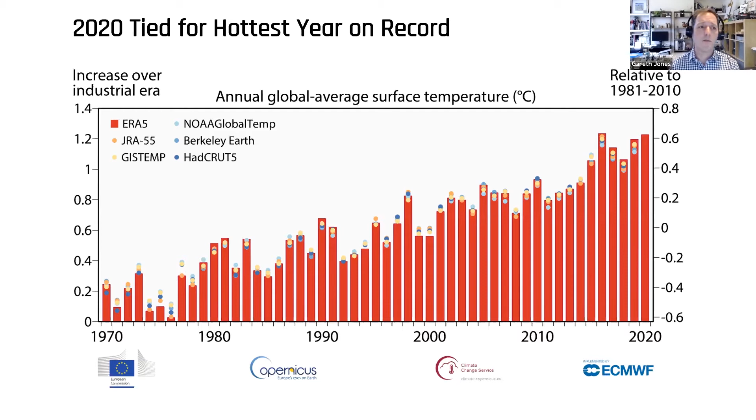The other thing notable about 2020, other than COVID and its impact, is we can't forget about the other big challenge we've got. 2020 was tied for the hottest year on record. The issue hasn't gone away. We had a minor blip down in carbon emissions with lockdown across the world, but that's coming back with a vengeance. But again, it showed that the changes we went through demonstrate that we can make a difference, a short-term difference, and we have to make changes.

I think that's really clearly illustrated here. When we're talking about heat networks, fundamentally this is about heat, but it's also about heat networks within the context of the change we need to make, climate change and decarbonisation. Heat networks are a demonstrated model for reducing carbon from heat. I know a lot of people have seen this before.

What we've got on the left is heat supply to Swedish domestic district heating systems between 1969 and 2015 by heat source. What we saw is significant growth over a 40-year period of supply from district heating. At the same time, over on the right, we've got the CO2 per megajoule of heat delivered.

During the early period it was quite heavy in terms of carbon intensity, but then we've seen an almost total decarbonisation of heat over that period, particularly between the 1980s through to 2000, start of 2005, where we've got that really big change, especially between 1980 through to 1994, that 15-year period.

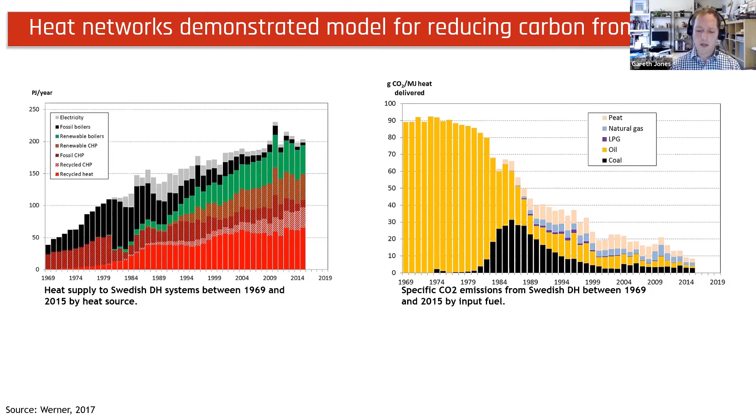I think that's the key lesson we've got here: heat networks are a really good model for decarbonising heat. And that's been recognised, which is why that's become a model being put forward. All three different strategies we've got from the Energy White Paper have a base case for heat networks, and heat networks are an attractive model for the UK.

Particular reasons: it's technology agnostic and it's permissive, so you can have multiple generations of technologies, and that's what we saw in Sweden, where one technology was substituted out for others. We saw thousands of megawatts of heat pumps come in during the 1990s and substitute out coal. So it's great from a transitionary technology perspective.

It also allows managed interaction between power and heat, and that's what we're seeing a lot of in Denmark now, where when power prices drop, you can have heat coming in and the real use of storage within that.

Really importantly, we know it actually works. It's not a technology where we have to have big changes or be counting on future change. It's not CCS, it's not hydrogen. We actually have case studies of this working at large scale. Other technologies may well work, but here we have a technology that we know works.

And we're also a really long way down the experience curve. We've been investing into this really since early 2000. We've had a couple of waves, but if we take the changes back in 2006 with code for sustainable homes, we had a lot of resurgence. So over the last 15 years we've really been looking into heat networks, and I think we're a long way down the experience curve, but it is a big challenge.

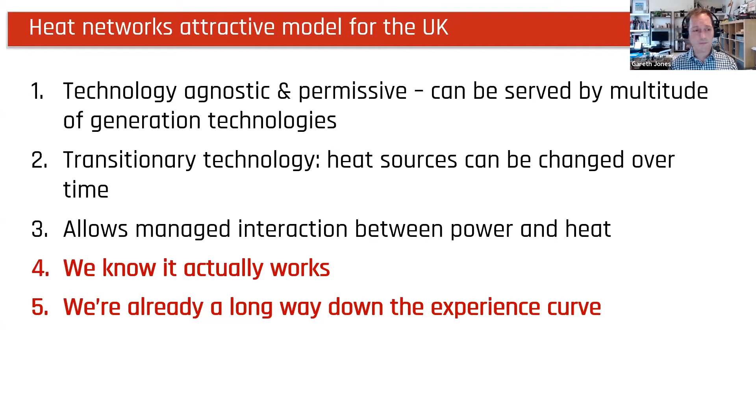But if we just start at 20%, it's a massive challenge. I'm going to do really back-of-envelope figures here, and I know all the engineers in the audience will shoot it down, but bear with me, we're talking order of magnitude here. If you just take your domestic fossil fuel boiler capacity in the UK, 25 kilowatt average boiler size, we've got 24 million homes. That equates to about 600,000 megawatts of boiler capacity that we have to transition away over the next, let's say, 25 years.

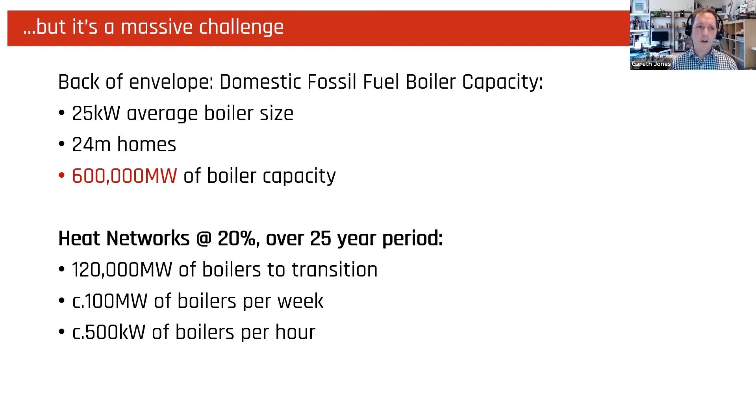If heat networks had to be 20% of that, and I think that really is the baseline of what we should be aiming for, over a 25-year period it's about 120,000 megawatts of boilers to transition away from, which is about 100 megawatts of boilers per week, or about 500 kilowatts per hour. Again, really rough numbers here. Just putting that in context, what that means is we have to have huge continuous growth sustained over a 25-year period while decarbonising.

On the left, the photo there, I took this from the Engie website. King's Yard is seen as one of the real flagship heat network developments in the UK, Olympic Park. This is the King's Yard energy centre. From the website, 45 megawatts of heat. So in terms of transitioning away capacity, that equates to about 2 times this capacity every week, and we need to do it on a zero or low carbon basis.

On the right, we've got Queen's Quay up in Glasgow, a beautiful energy development, taken from the Star Renewables website - you've got the twins down the bottom. We've got 2 water source heat pumps, 2.6 megawatts. Again, a fantastic flagship development. We need to be getting up to doing 2 of these every day.

So that's again getting to 20% market share. That effectively implies an 11% cumulative annual growth rate every year, for 25 years. Again, I don't think we should be seeing this as a 'oh my God, that's too hard to do.' It's a 'oh my God, what an opportunity.' And I think we do have a huge opportunity.

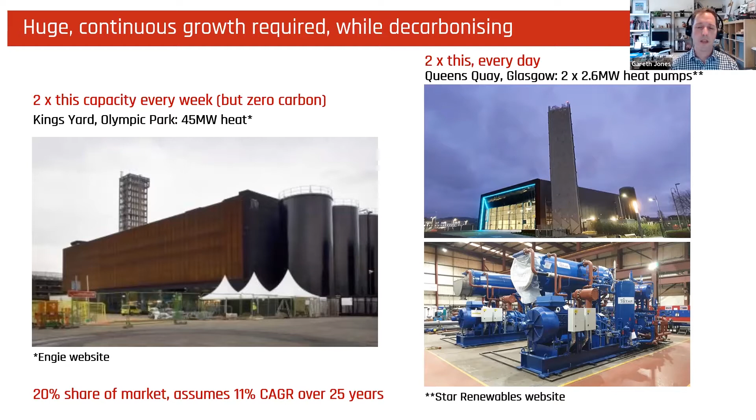And I think what we've seen over the last year is that we can transform ourselves. But it does mean that we have to tackle every single aspect of the industry, and we have to change every aspect. So we're going to now run through different speeches.

So we've got regulatory changes - Caroline's going to go through that before we get into customer protection from Shivali. Assurance, Mariota's going to go through that. CP1 2020 from Phil Jones. Then we talk about skills gap with Tanya, and then how the industry is going to respond from Noah, followed up by a panel discussion.

So first up is Caroline Bragg, who's head of policy at the ADE. Caroline, do you want to come in?

Perfect. Good morning, everyone, and thanks so much, Gareth. So, as Gareth was saying, I'm going to give a quick overview this morning about the regulation and the policy that we can see coming forward in the next few years, and then where we might go after that, and its impact on heat networks, and more particularly the ability to decarbonise.

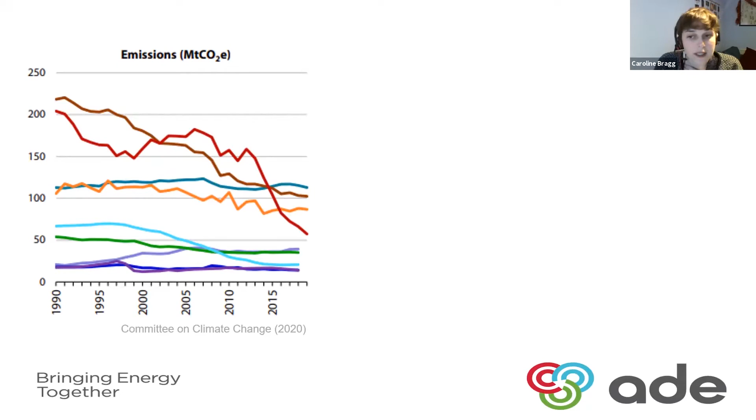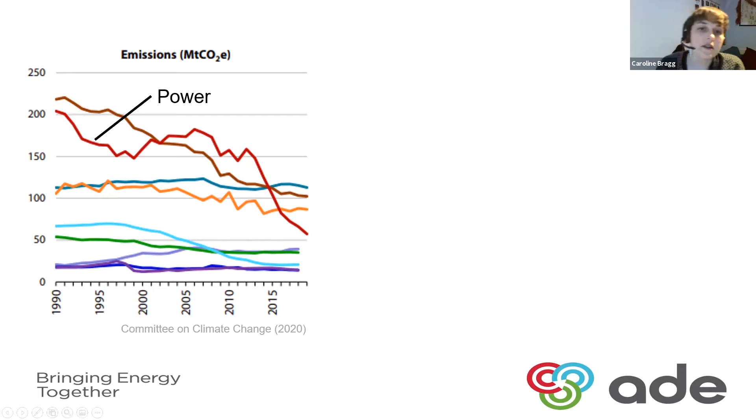Firstly, I think it's important when we consider this, just building on what Gareth has said, to consider the challenge that we have, particularly on the customer side. Obviously, as many people talk about, we have made quite significant strides in terms of power decarbonisation over the last 30 years or so, but that has not been replicated yet in building sector emissions, and they remain roughly where they have been since the 1990s.

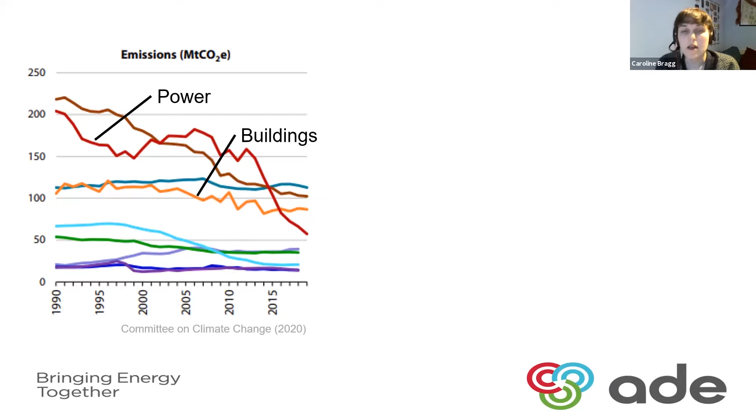On top of that, I think it's also important to bear in mind that awareness of the challenge of heat decarbonisation is actually relatively low amongst the public. So two years ago now, only 49% understood that gas central heating was a source of carbon emissions, and less than 20% had considered switching to low carbon heating.

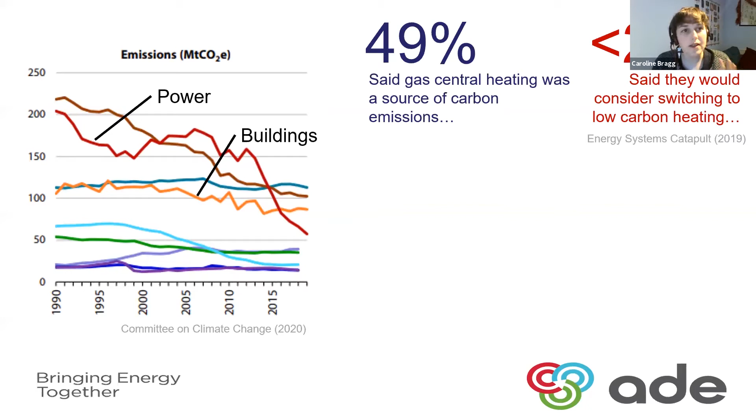You can also see that type of awareness replicated in people's understanding of heat networks in the UK. So, coming to that context, what are we going to see thrown into the mix in terms of policy and regulation in the next few years?

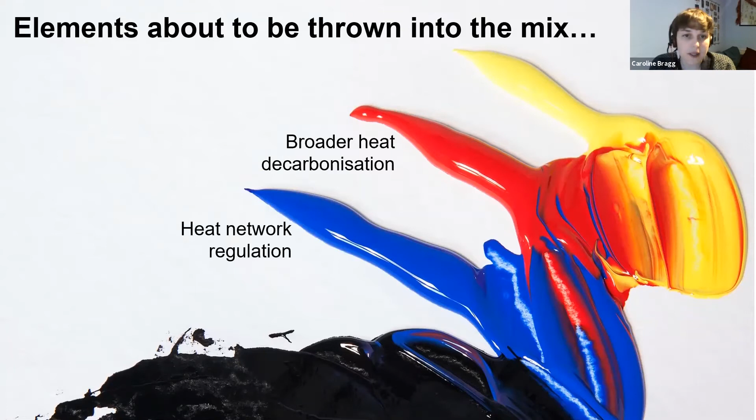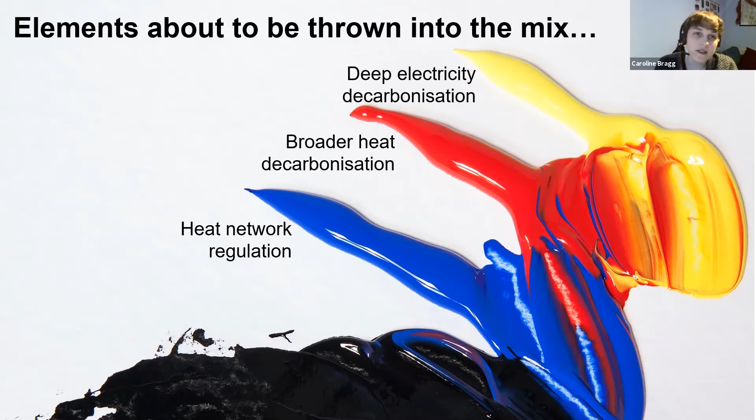What I'd like to do this morning is take you through, I think, three key themes that we need to think about. That is policy and regulation specifically targeting the heat network market and what that might mean. Secondly, looking at broader questions of heat decarbonisation, where policy and regulation might go, and what that will mean in terms of its impact on the heat network sector. And then finally, I also wanted to add a few comments about future policy and regulation towards deep electricity decarbonisation.

So, to start with, let's talk heat network regulation. As Gareth said, there is an enormous amount of policy and regulation that is coming forward this year and in the next few years.

Obviously, what we have seen is local planning pressure towards decarbonisation continuing to grow, and I think we will continue to see that going forwards, particularly when you consider the local authorities that have declared climate change emergencies, and the steps that they might take to achieve that. Clearly as well, only last week, we had new building regulations in the form of the Future Homes Standard, which will also drive particularly decarbonisation in new buildings.

The other things that we see coming forward will have a very significant impact on heat networks too. This year, we have new metering and billing requirements, and then from 2022, we will have a general authorization and licensing regime for the heat network market that will include likely customer standards and redress mechanisms, technical standards for both new and existing heat networks, emission limits or some form of emission standards for heat networks, and for those who opt for the licensing regime, new powers in the form of statutory undertaker rights.

Beyond this, and in parallel, what we are also going to see is new funding schemes in the form of the Green Heat Networks Fund from 2022, and also possibly the introduction of heat network zones that will give new rights and powers and incentives to connect to heat networks in particular areas.

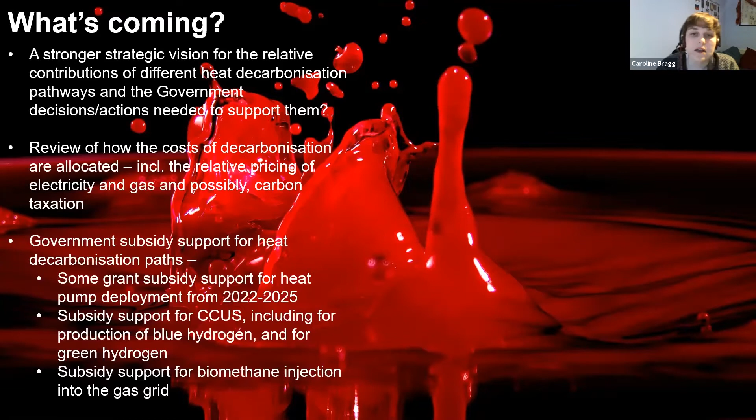Reflecting on what this means for heat networks and their decarbonisation raises a number of really important questions. Firstly, at the most political, most strategic level, this is a really crowded field at the minute, with a lot of different visions for the future jostling for political and ministerial attention. It's really important for us and for the heat network sector more broadly that we are firmly establishing ourselves and continue to maintain our place at that table.

Secondly, there is still a lot to be won and a lot of opportunities, but also some risks, in terms of how the shape and the detail of all of this regulation and policy that will come forward will reflect on its impact on the heat network market and how far it will support heat network decarbonisation.

Finally, this raises some really big questions about the future of energy infrastructure in this country and how we pay for it. Over the next few decades, it's clear the most likely outcome is we will see a really quite significant expansion of the electricity networks. We may well see new infrastructure being put in place for hydrogen, as well as the repurposing of the gas networks, and we will have new heat network infrastructure at the same time as potentially a shrinking of the existing gas network infrastructure in some places.

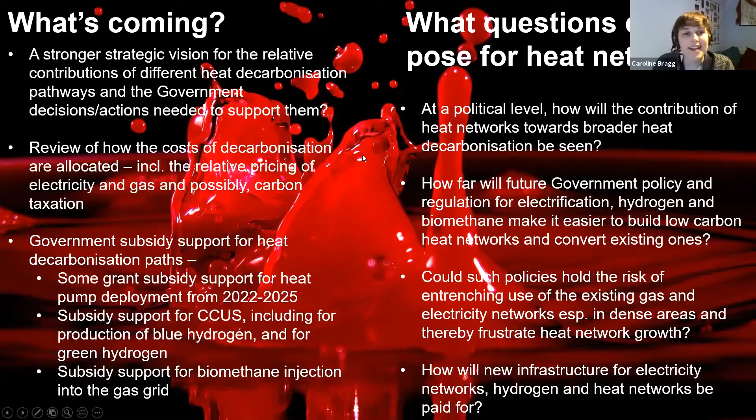Finally, I just wanted to say a couple of things in terms of where electricity policy and strategy might go over the next few years and what it might mean for heat networks. For the purposes of our discussion today, the two really big questions are firstly, what the government will say over the next 10 years about how it will secure enough and the right types of capacity for a decarbonised electricity system.

Then secondly, there is an enormous piece of work to be done about increasing flexibility across the system over the next 10, 20 years. That comes from both a national level, in terms of the ability of the system operator to access and to source flexibility from smaller distributed assets, and it also brings into view the role of the distribution network operators, their likely potential transition to a distribution system operator, and an enormous uptake in their procurement of flexibility services.

For heat networks and for their decarbonisation, I think that raises a number of specific questions. Firstly, if we think that the vision of the future on the electricity system is for much more volatile pricing, real value and revenue to be had from being flexible, that raises a question on the importance of making sure that heat networks can respond to that, making sure we're not putting in place business models or designs that frustrate the ability to respond to that, to make money out of these new markets, but also a real potential to really integrate these systems together to provide real system benefits on both the heat and electricity side from the flexibility that we have within heat networks.

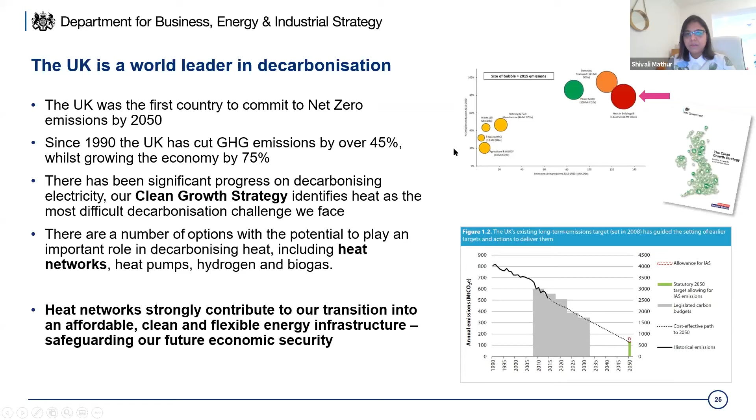Putting into perspective, today we have around 14,000 heat networks, out of which 2,000 are district heating, serving around 500,000 customers, largely gas-fired CHPs with peaking boilers. And right now we have heat networks supplying around 2% of the UK's heat demand. But in 2050, the Committee on Climate Change estimates this could be as much as 18%.

Personally, I agree with Gareth, as he said, it should be above 20%. But I like to put it more into the terawatt hours perspective. So thinking about terawatt hours, that's probably somewhere around 80 to 90 terawatt hours of heat delivered from district heat networks by 2050, which is a sizable chunk.

And these numbers are driven by the Committee on Climate Change and what they consider to be our most effective pathways to reach our carbon targets.

So why do we like heat networks so much? They do not save carbon on their own, but what they enable us to do is unlock some of the really exciting large-scale low carbon sources of heat available right away across the country, whether it's waste heat from industries, heat from energy-from-waste plants, mine workings, the Coal Authority's heat maps, rivers, and other sources. Because of the greater efficiencies, improved performance, ability to trade on the system, and the role of flexibility, ESOs and DNOs, plus the ability of heat networks to store energy and respond to the wider system.

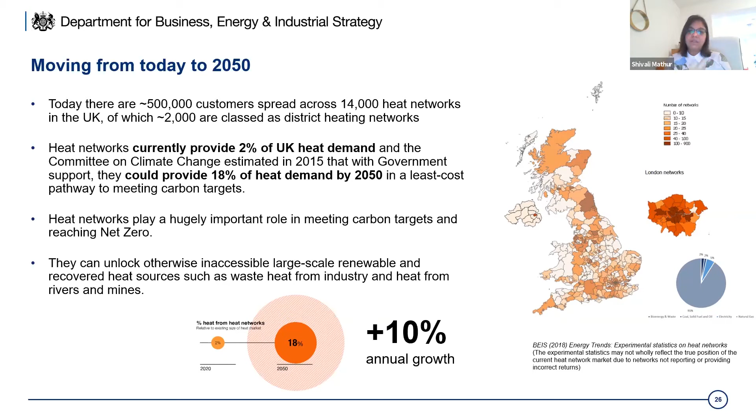What we're doing is enabling a much more effective use of energy in meeting that demand.

Now, really quickly, because I want to move to the market framework bits, I'll whiz through the UK government support available on heat networks. In addition to our own team support, the government now backs heat networks with more than £500 million, giving a strong signal of support, namely with our flagship capital support program, the Heat Networks Investment Program, HNIP, with £320 million, which provides commercial and construction funding. We recently announced the £270 million Green Heat Network Fund, targeted to decarbonize new and existing heat networks.

We're proposing a green gas levy on gas suppliers to support and fund green gas injection into our gas grid.

As government, we have been supporting local authorities since, I think, 2013, and I'm proud to say we have supported over 250 unique projects across 150 local authorities, from master planning to feasibility to detailed studies, with around £23 million of investment.

The most exciting bit of my presentation, consumer protection, is the next two categories. We are committed to developing a long-term market framework for the sector, with the heart of it being the consumer: enhancing consumer protection, setting out standards, encouraging low carbon solutions, and promoting investment. I think it's about striking the balance for consumers and investors, getting the price right through the framework.

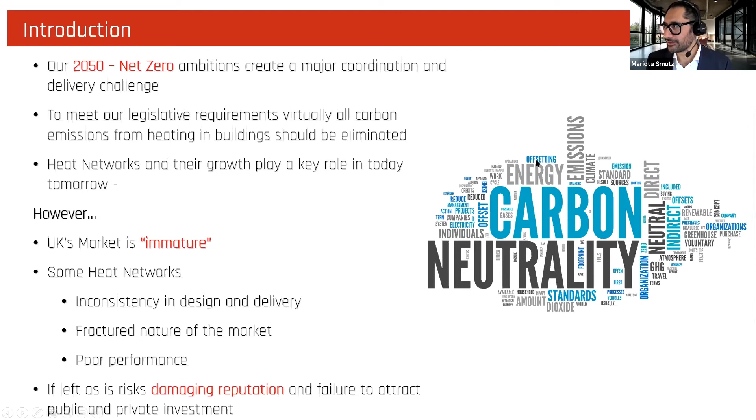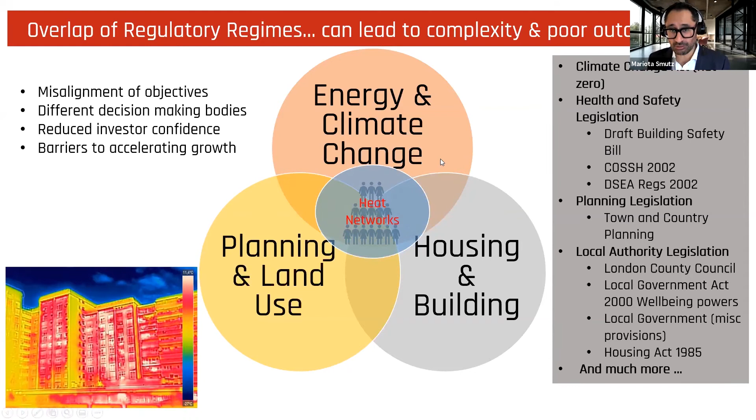Often we tend to look at these issues through the energy and climate change lens only. However, heat networks exist in that neat space across other regulatory regimes too - urban development, planning and land use, quality safe buildings that meet our needs of how we live, work, study and play today and in the future are all mechanisms that are also in flux. As mentioned earlier, we've been upended through our experience with COVID-19. So how we build and where we build and the quality of our homes creates an expectation of our service levels, and that expectation, of course, is through to our utilities that'll play a key factor. No doubt, our panel members will turn their minds to this later on. Creating quality heat networks are at the center of these different regulatory decision-making frameworks, and it's important we can navigate all of them to help this market grow.

Within the context and horrific circumstances in Grenfell, many factors came together to produce a terrible tragedy, which could sadly have been avoided. Although in the context of building safety, these systematic issues identified here can be extended across to heat networks.

Key issues identified by Dame Judith Hackitt's report: there's a culture of indifference that perpetuates issues such as unclear roles and responsibilities of those procuring, designing, constructing and maintaining buildings. The package of regulations and guidance in the form of approved documents can be ambiguous and inconsistent. The processes that drive compliance with building safety requirements are weak and complex, with poor record keeping and change control. In too many cases, competence across the system is patchy, and the product testing, labeling, and marketing regime is opaque and insufficient. And most importantly, the voices of residents often go unheard, even when safety issues are identified.

We need a cultural shift away from this indifference to a culture of high performance. We can't grow a heat network market with confidence if we don't learn from this particular event. It's really important that we recognize this systemic trend is absolutely applicable through to the heat network area.

Creating a transformational cultural shift and sector-wide behavioral change is hard, and people and industries are comfortable being comfortable. So to get to where we need to go, certification to industry specifications will provide a catalyst for real and significant change. The transition journey must begin with getting it right up front, as we don't have 40 years to allow for organic growth.

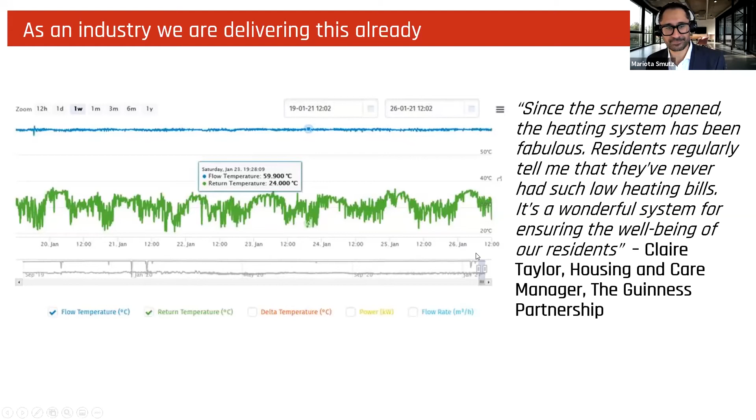Again, if we get a heat network performing well, end customers benefit significantly. The Heat Network Assurance Scheme will assess conformity to CP1 2020, and this will be the lead for a cultural shift, lifting performance and operating as a key feedback mechanism to the industry as it grows. This in turn will unlock the market further and reduce uncertainty for investors.

We see assurance as being particularly important in this early phase as market stimulation is occurring. It's an essential ingredient to build confidence.

We've identified some key stakeholder benefits for assurance. From the resident end user: increased reliability, less likelihood of overheating and network interruptions, increased comfort, affordability - so it can contribute to reducing fuel poverty - and improved experience when all of these are in place.

From the developer, there's value for money, leveling the playing field, ensuring practices are consistent across projects, and increased transparency of costs, reduced risks, clear delineation of roles and responsibilities, and increased integrity of integrated planning. Skills transfer and verification to ISO standards is an important feature of our heat network assurance scheme, providing a high level of confidence across the industry.

From an operator's perspective: clear delineation of roles and liability, less planned and unplanned outages, and reduced ongoing costs and maintenance. For the owner investor, increased confidence in the market and de-risking the project.

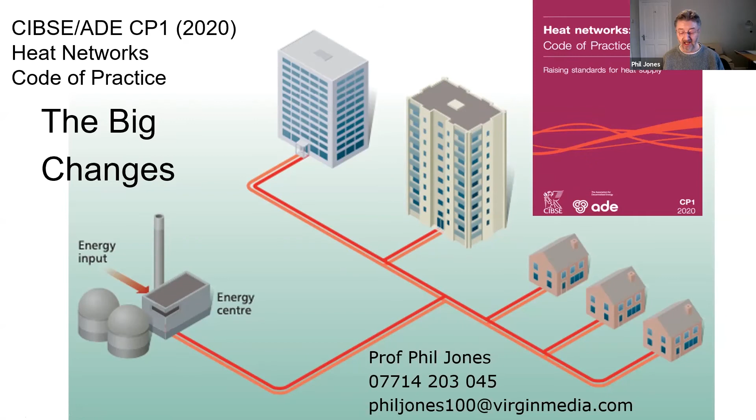So I am the lead author on CP1, and I think I was with you in RICS last year promising that CP1 would come out. There were some significant delays, but it's out. Hooray, at last. So there have been some very big changes, and I wanted to give you a flavour of them. Next slide, please, Gareth.

So officially called CP1 2020, to differentiate from the 2015 version. It's a massive update. And one of the things we recognized is just how important the client briefing is. It sounds obvious, but I don't think we had enough emphasis in the 2015 version. And so we've now got the client briefing right at the heart of this whole process.

And it is a process now, not just a series of technical minimum requirements. This will greatly improve procurement of heat networks, specification of heat networks, and the whole process from one end to the other. These are very long projects and complex projects, and we need to get them right from the start.

But the 2020 version has also got much clearer roles and responsibilities throughout the whole project. There's a greater emphasis on compliance, not just compliance at the end. There is little point in checking that it sort of maybe works at operation. You've got to check it at every stage. And we now have a process within CP1 to check at every stage that the client's brief is being met. Next slide, please.

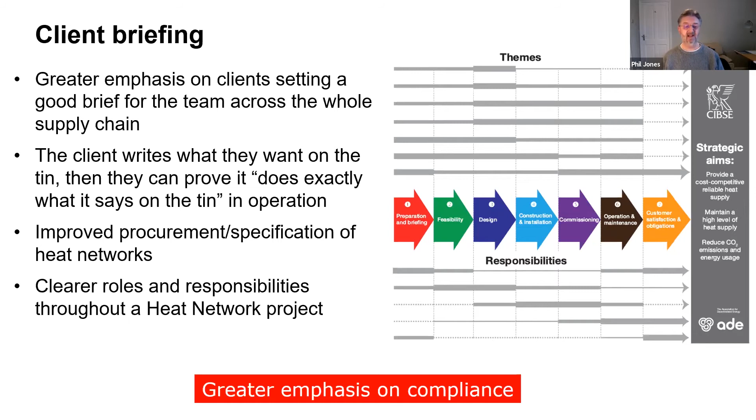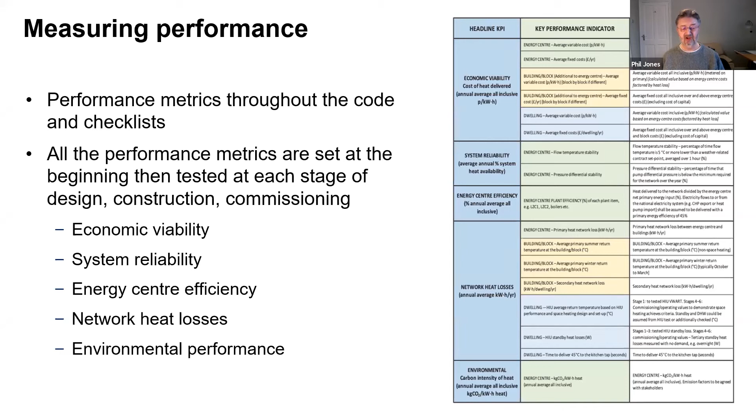As part of that, we also have running right throughout the whole process, documented performance metrics. These are in the checklist that I'll talk about a little later, but these performance metrics are, again, set by the client and his team at the beginning, and then you check at the end of feasibility that you're still meeting them. You check at the end of design that you're still meeting them, and so on and so forth. And they're fairly wide-ranging, and the client can add to these, but we've put in economic viability, reliability, efficiency, heat losses, and environmental aspects.

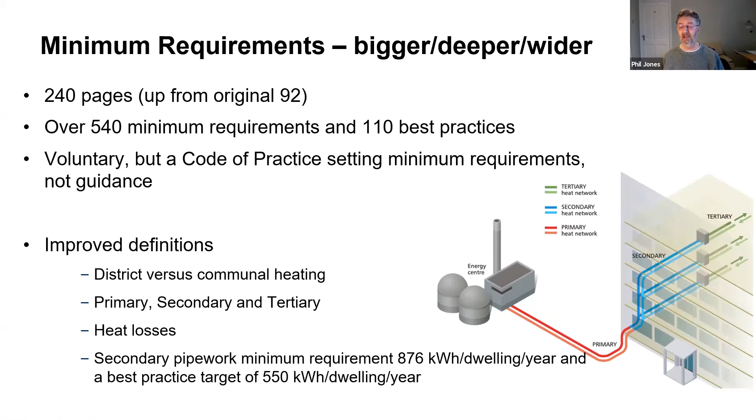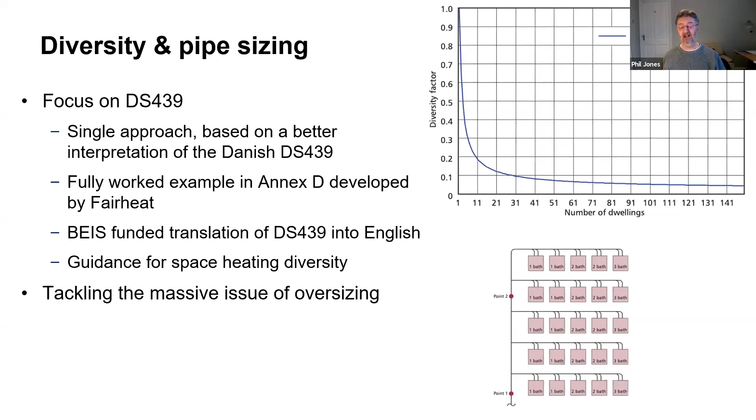And there is a very, very good now Annex D developed by FairHeat. So thanks to FairHeat, well done. And that is the sort of diagram at the bottom there, showing a whole process, an example, a case study, if you like, of how you should, and therefore how you should not use DS439. It was being misused after the 2015 version. This is all about tackling the massive issue of oversizing.

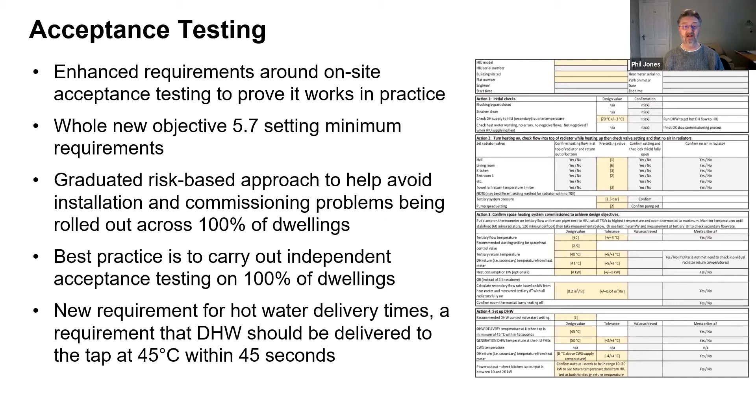And we've now got, and this only went in fairly recently, hence some of the delay, a new requirement on hot water delivery times for 45 degrees C within 45 seconds. That is a customer service and a piece of acceptance testing. And we've put a checklist in that you can see on the right there. So a lot more on proving it works.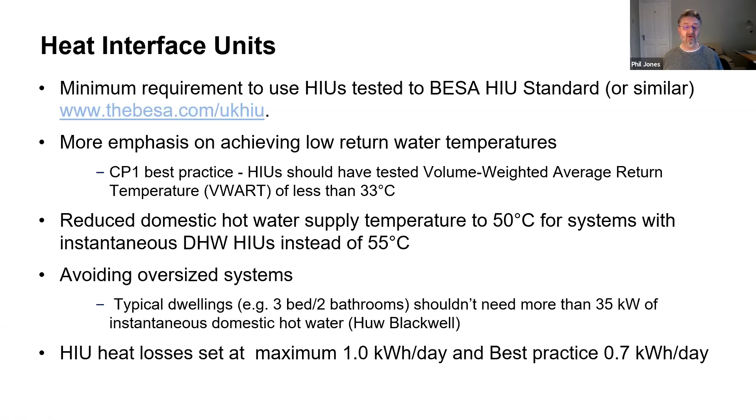There's lots around reporting back to the customer, better information to the customer. As I well know, if Mrs. Jones is not happy, then we failed. So I think this is a very important theme in CP1.

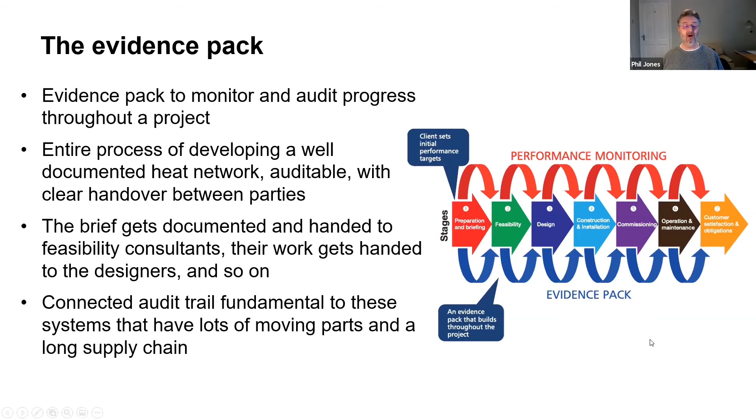Next slide, please. So that's me almost done. There is lots more, as I say, that's only a snapshot of what is in CP1. I think it's a huge step forward. Huge thanks to my fellow authors, Paul Woods and Martin Crane. We've all got lots of scars on our back, but it's been worth it.

Huge thanks to the expert steering committee of up to 50 people, including corresponding members, well over 100 contributors and commentators, thanks to them. And poor old Phil, Paul and Martin had to go through over 3,000 comments over 3 rounds of consultation. But particular thanks back to Mike Ridge and Tom Norton and Gareth, huge thanks for all your input. You've had a massive input, including that appendix.

So an epic journey of probably 2.5 years, huge consensus. It is still work in progress, in my view, on a much longer journey, but it does provide a platform for the future. I do believe it will underpin the regulatory framework that was talked about earlier. May the code be with you. Thank you.

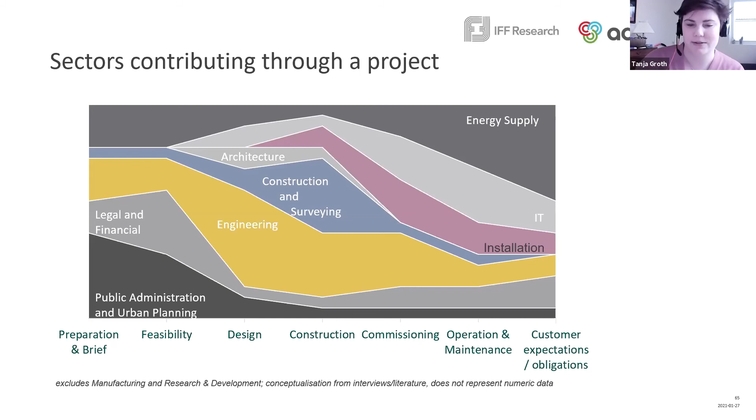So across the life cycle of development of a heat network project, you get varying degrees of involvement from different sectors across the industry. Next slide please, and just click through, I think.

A great example of this is, if you look at the role of a project manager in a heat network, they really need to be able to understand the construction and surveying bits, the engineering bits, the architecture bits, public administration and urban planning, legal and financial, energy supply, IT, installation - the whole shebang they need to get on top of.

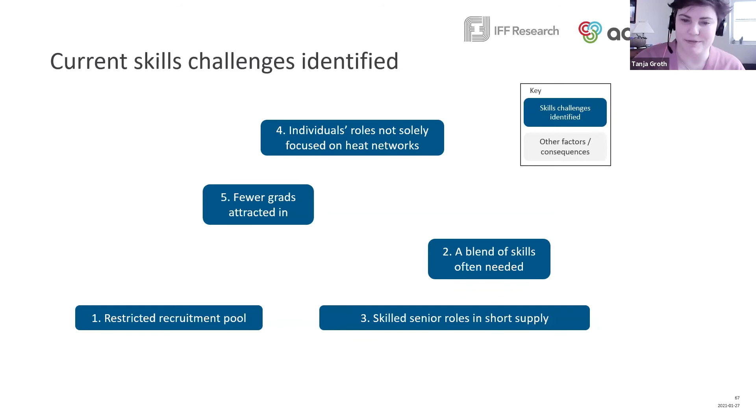In terms of that, I have a newfound respect for project managers within the heat network industry.

In terms of skills and challenges identified across the industry, the blue points highlight particular issues we're facing: restricted recruitment pools, partially because the younger generations coming fresh-faced out of university aren't necessarily aware of what heat networks are. This links back to the slide Caroline was presenting earlier from the research done by the Energy Technologies Institute on knowledge about what heat networks are in general.

You need a blend of skills; it's necessary to function in the heat network industry. For myself, I'm an economist, but in order to work in the heat network industry, I really do need at least some understanding of the technologies involved and how the components link into one another. I also need to understand bits of stakeholder engagement and a little bit of legal and IT skills on top of that. And that's just as an economist, and my role is very trivial in terms of heat network delivery. But that blend of skills is necessary.

So you do tend to see a lot of engineers working across multiple sectors and partially working on heat networks. They really do have to have a solid foundation of what a heat network is, which is why it's so great that the update to CP1 has come out. Skilled senior roles are in short supply.

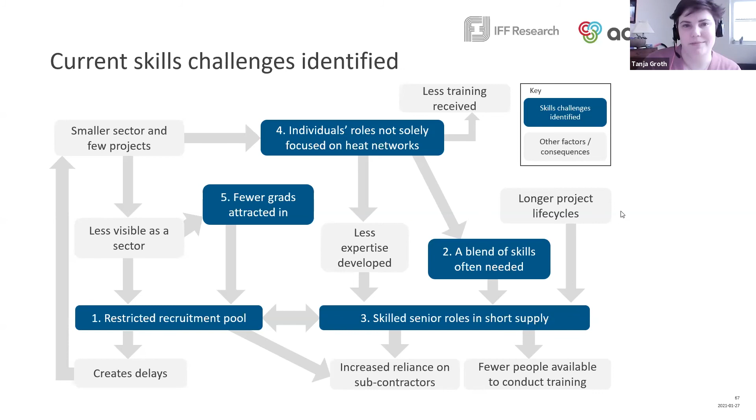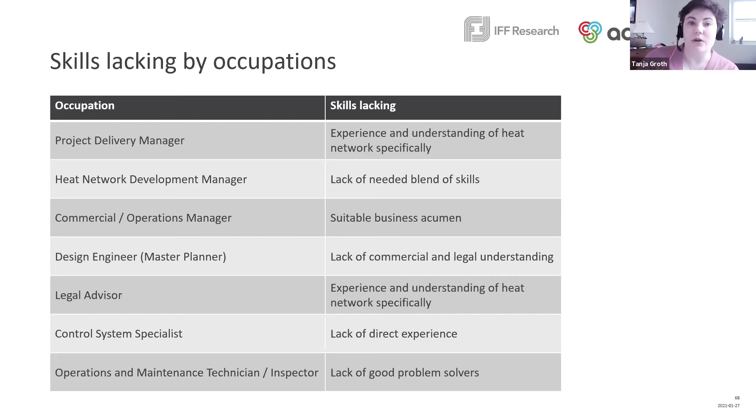So, current skills gaps and the impacts on networks. What do we get? We get delays to the development of heat networks because finding the right people with the right skills to deliver them takes a longer time. I think anybody involved in public sector procurement knows how difficult it can be to get consultants with the right type of experience to bid for a role, or contractors with the same technology experience as the specific technology chosen for the initial heat network.

You get lower quality projects — we've all seen examples of those. They cost more to deliver because skills are at a premium. And then there's a reliance on subcontractors, and that can create issues. It can also be great — it doesn't necessarily have to be a bad thing, but generally speaking, when you don't have enough understanding in-house, it creates issues. For example, going back to Phil's presentation around setting up that client brief, if the client doesn't have those skills in-house, they might have to rely on subcontractors, and that isn't always optimal.

Next slide, please. So what are we doing about it? Well, in the short term, there's a number of initiatives being explored: employer-led partnerships, encouraging trade associations to respond to calls for evidence, promoting the sector to young people, and liaising with energy hubs and local enterprise partnerships.

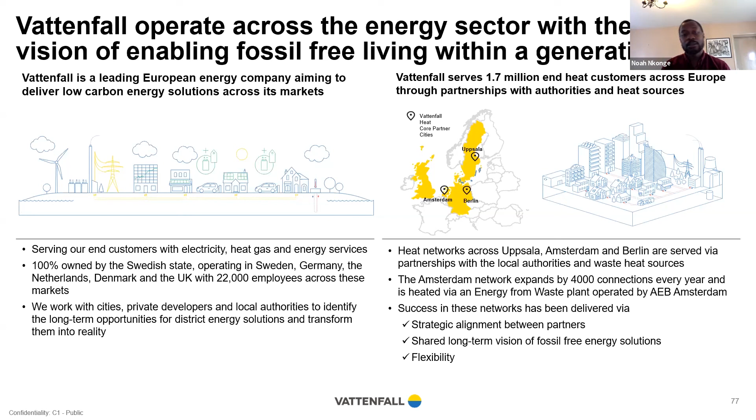Next slide please. Vattenfall decided to enter the UK market about 3 years ago, because as Shivali was mentioning, there was government support with funding, binding climate change targets, and also property developers and local authorities calling out for heat solutions that would allow decarbonisation of their developments.

What I really wanted to bring out from this slide is the type of projects that relate to what we think needs to happen in terms of scale and ways of working to meet net zero from the heat network perspective. This is very much about projects that have the potential to build up at scale, working in partnership, bringing together local authorities, private developers, and waste heat sources as well.

Brent Cross South is an example where we're working in partnership with a private developer to regenerate an area in North London, which would serve about 10,000 homes equivalent. In Midlothian, we've been selected as energy partner for the council, initially looking at a scheme of about 3,000 homes, but this has potential to expand northwards and capture existing buildings. And then Cory Riverside as well - we've got a partnership there with the energy from waste operator, again potential for 10,000 homes initially, that could expand up to 75,000 homes in due course, capturing existing buildings as we go.

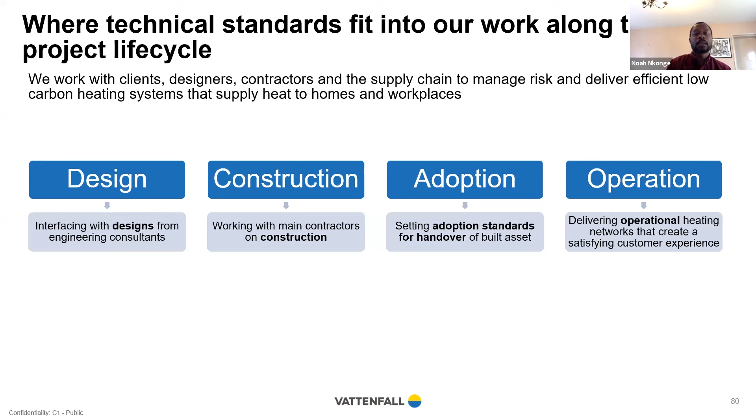Next slide, please. So, as an industry, as an ESCO industry, we cannot afford to wait for the government before we start adopting these common standards. We've already got CP1 here. We don't need to wait for regulation to start telling us to use these excellent standards.

And ultimately, they'll be of benefit to all the different stakeholders. They'll drive up quality in the heat networks. They'll drive down cost and risk. It'll make the job a lot easier for clients who don't have to look at different specs and different designs and get confused about that, and iron out the risk in delivering projects, because there's that clarity that the heat network is going to do what it says on the tin, to paraphrase Phil.

And it's good for our customers because, as was mentioned, there's a low understanding of heat networks and heat decarbonisation options in general. So we need to build consumer confidence and have reliability and peace of mind, not only for the end customer, but for developers who are going to be working with those customers ultimately in the buildings. And for ESCOs and the industry, it's great because we get the shared learning, for example captured in codes of practice, etc., which helps streamline the design and de-risk the delivery of heat networks, which actually means the cost of capital can go down once we have a better understanding of performance.

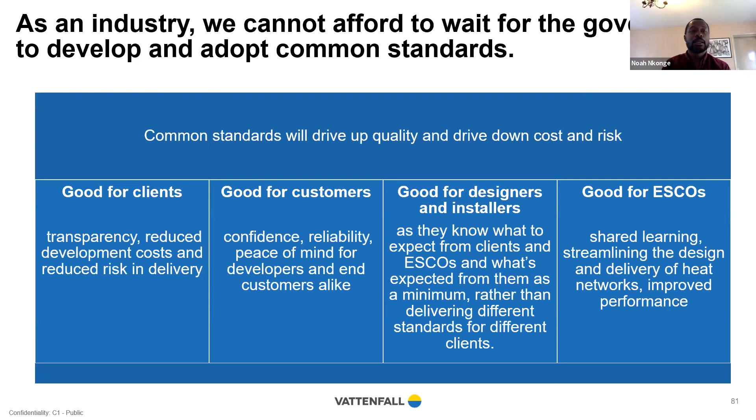So next slide, please. As I mentioned, our approach is to be ahead of regulation as Vattenfall. We welcome common technical standards, and we're already designing and delivering our heat networks now to be compliant with what we expect the standards to be, or in some cases exceed, where that's appropriate.

So we're comfortable with regulation from our European operations. There was already mention of the Scandinavian, the Danish standards used for the sizing of pipes, for example. And we haven't been waiting for CP1 to start implementing some of the guidance that's already in there, so the use of low temperature heat networks. We don't specify CHP and gas boilers as part of our mission.

We want to be fossil free in generation and power climate smarter living. So what that means for us is we don't specify any fossil fuels where possible. We don't specify gas CHP. It's very hard for us to get projects approved by the business that still include combustion. And if there is a need to have gas boilers, for example, for peaking plant, there always needs to be a route to zero carbon.

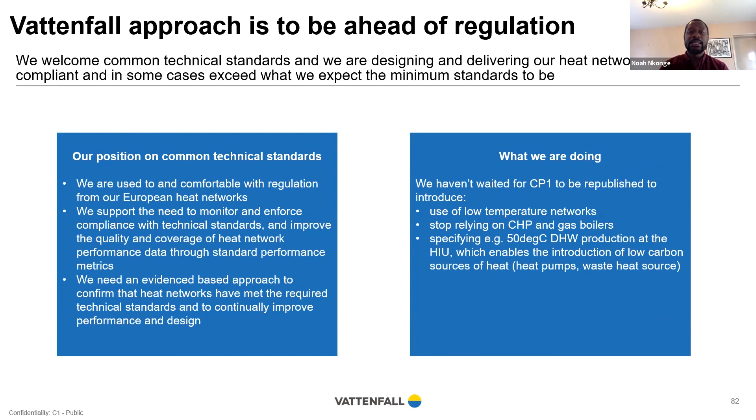And that relates to that last bullet point about the specification, for example, of 50 degree hot water production at heat interface units, because that really opens up the potential to make use of waste heat from the local environment, which is a key pillar of how we approach projects. Before putting in new equipment, we really need to make use of the heat that's available in the local area. Next slide, please.

So, to bring that all together, to meet the heat decarbonisation challenge, we're very supportive of a market framework that will unlock this, and that includes regulation and assurance. And we're keen to work with all stakeholders to help with this.

We are represented on the boards for the Heat Network Industry Council, which is looking at pathways for achieving heat decarbonisation. I myself am chairing the working group on smart livable cities, which looks at zoning, how we address the retrofit market, and importantly also digitalization, because as a couple of the speakers mentioned, there's going to be a coupling of electricity and heat and opportunities with the flexibility market. So what's going to be really important with heat networks is how do we know what's happening on the heat network to allow us to, for example, reduce the strain on the electricity grid.

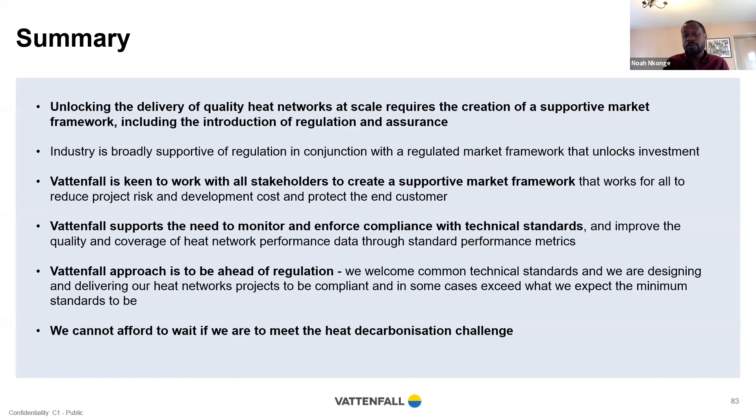And as I mentioned, we want to be ahead of regulation, and we cannot afford to wait if we're to meet the heat decarbonisation challenge. So next slide, please. Yes, thank you everybody for listening, and I'm looking forward to the panel discussion.